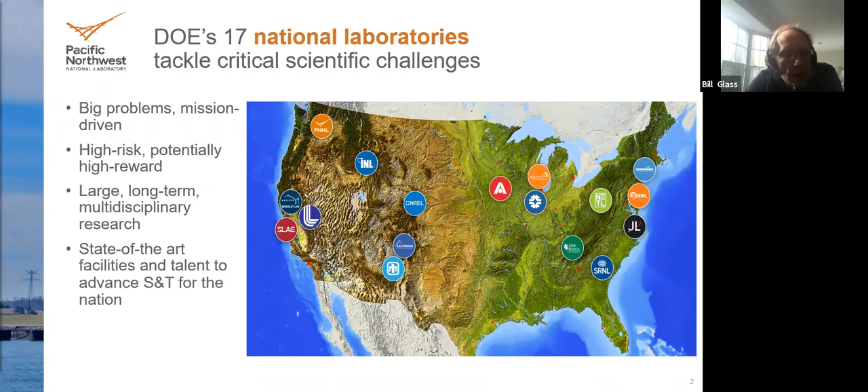Why doesn't it advance? Frozen. Yeah, technical difficulties? Yeah, let's see what happened. Here we go. There you go. Okay, so we use the page down button and that seems to work.

We've got focus in the areas of energy and infrastructure, energy security and emergency responses, energy efficiency and renewable energy sorts of things, nuclear energy and regulatory work. That's the area in which I work. Also, we've got a division that works on carbon management and fossil energy and environmental management. So there are lots of different groups, but it offers some interesting opportunities for work.

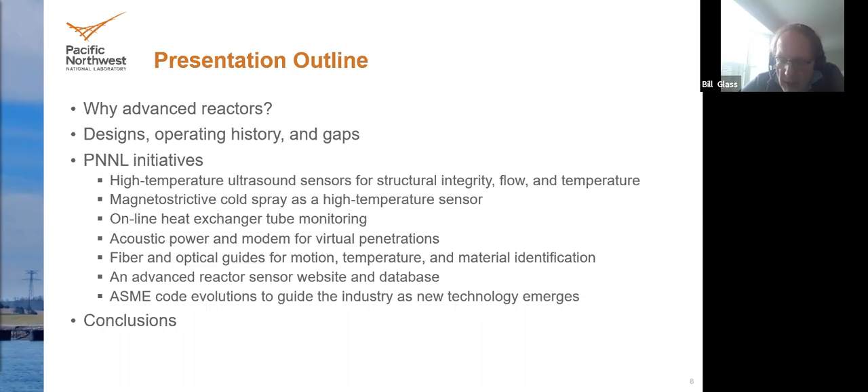Whoop, hang on here, we've got to do something. So this came from something where I had to narrate and make a video out of it, and that still goes with it - I didn't realize that until just now, but I will tell you about it myself personally.

Can everybody see my cursor so that I can point? Yes, we can see it just fine.

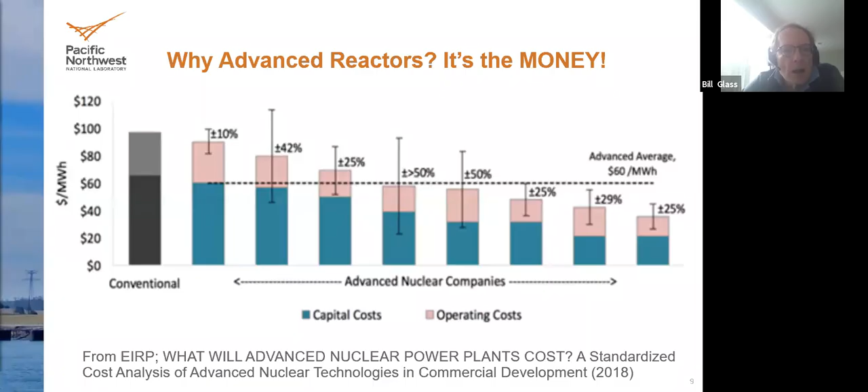Yeah. Whoop. It's not paying attention to my cursor. Okay.

First generation molten salt reactors plan to rely on known component technology. Let's see here. Okay, so they require pressurization of the fuel system to avoid pump cavitation, coupled with spray rings to evolve fission gas and tritium exchangers. In general, though, it's important to consider all of these kinds of things in the design of these reactors.

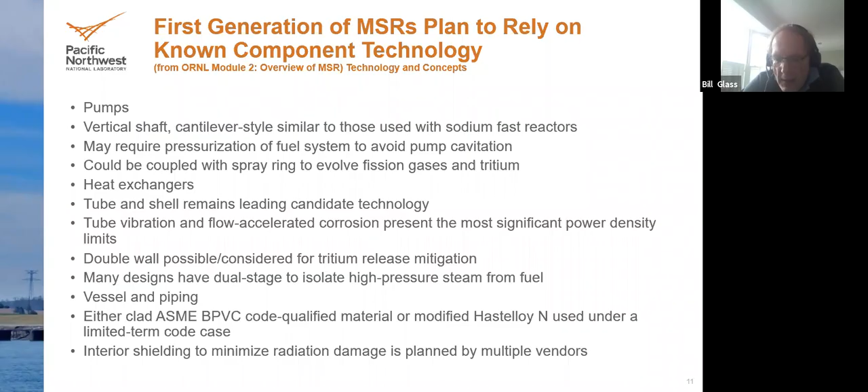Although our experience base is not very wide for molten salt reactors, there is experience for advanced reactors, particularly the sodium reactors. The experience related to sodium reactors is based on a number of plants that have been operated over the years, particularly in France and in China, Russia, and India. So there are literally numerous decades of experience with these sodium reactors, and a report was compiled looking at where failures occurred in these sodium reactors.

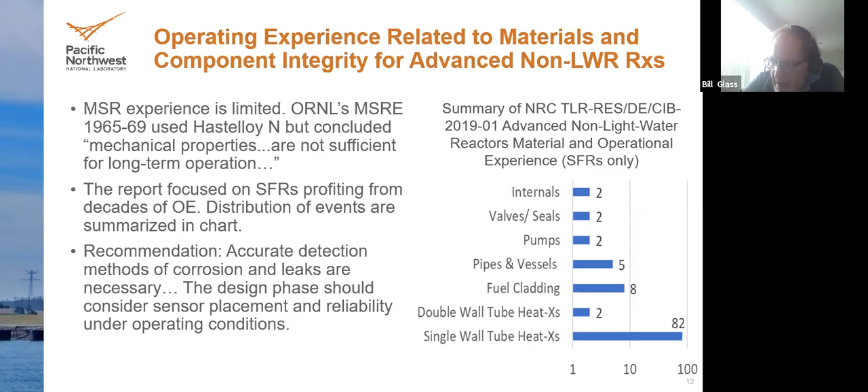By far the biggest component of these failures was associated with the heat exchangers, followed by fuel cladding failures, pipe and vessel failures, and pump seals and internal kinds of things. But this is kind of the distribution that would probably be expected in the full set of advanced reactor series, including the molten salt reactors.

So now I'm going to go over a number of different designs of advanced reactors, just to give you a feel for what these structures are. And they're all quite similar. So we'll start with the liquid sodium reactor.

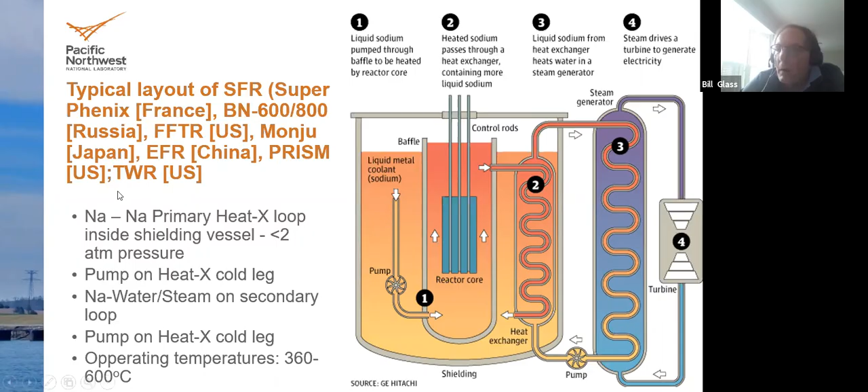Now we'll go on to a very interesting design being promoted by Hydromine. Hydromine is a lead reactor with a single stage spiral heat exchanger. This produces a very compact configuration, and we are actually working with Hydromine on this particular heat exchanger to try to instrument it and see what the condition of these tubes are, and I'll talk about that a bit later.

One important thing to note about all of these designs is that it's tough to get access to them in order to do inspection kinds of things. They are radiologically very, very hot. Also, they are thermally very, very hot. And it's undesirable to shut these plants down in order to be able to go in and do anything to them after they are started. They have to be designed for remotely decoupling most of these major components.

In order to be able to continue to operate if you need to replace anything or to inspect anything, this is why it's very, very important for online monitoring to be incorporated into the system designs. The online monitoring, I believe, will be virtually essential for the NRC justifying these things under continued operation. And candidly, this is a huge gap that we are trying to help fill at PNNL. Online monitoring, currently we don't know how to do that at the temperatures and in the configurations that these reactors are at. This is one of our efforts, though, to try to make this a manageable thing for this Hydromine design.

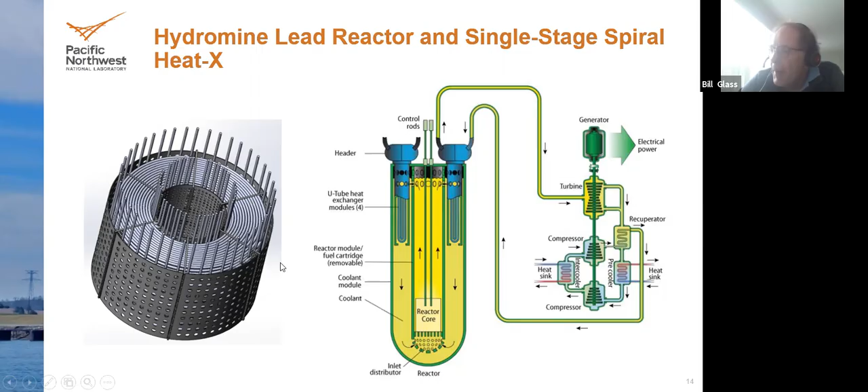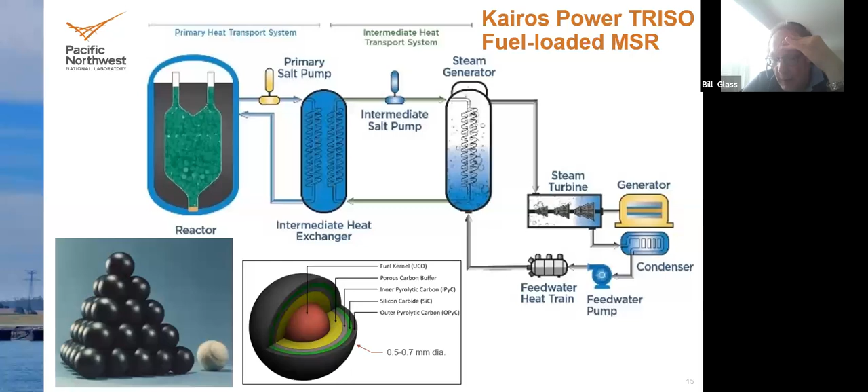Well, this particular design is primarily like the Kairos Power arrangement. Once again, though, you've got one or two levels, in this particular case, 2 levels of heat exchangers before you get to the turbines and the generator to produce the power. Again, though, these are tough to inspect. You really need to have online monitoring kinds of things.

Dissolved fuel MSRs produce an even more complex inspection issue, because this is radiologically the hottest kind of coolant fuel, in that the fuel is dissolved in the molten salt. But at the same time that you get more difficulty for inspection and a hotter environment, you also get the benefit of having the fuel in intimate contact and dissolved in the coolant, so that it's probably the most efficient way to produce the heat. There's less thermal losses due to the salt having the fuel directly in it.

Again, there are heat exchangers in this system. In this particular case, though, the idea for the FLIBE system is that their last stage, where they have pressure, is a gas heat exchanger rather than a salt or water heat exchanger. So that's a little bit of an aberration for that kind of design.

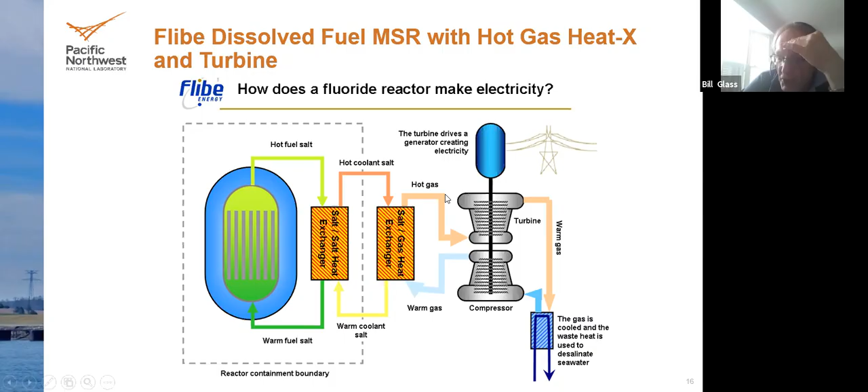Overview of some of the main distinct types of systems. We've got the molten salt single fluid. We've got the molten salt fast reactors. All of these are compared to LWRs like the AP1000. Then there's the sodium PRISM design and the Terrestrial Energy IMSR design here.

All of these things, though, if you look at the hot leg temperature, the AP1000 has the lowest hot leg temperature, and this is where we know the most about components operating. All of these other designs go from 5 to 700 C, which is really hot. And the material gap for these kinds of things is significant.

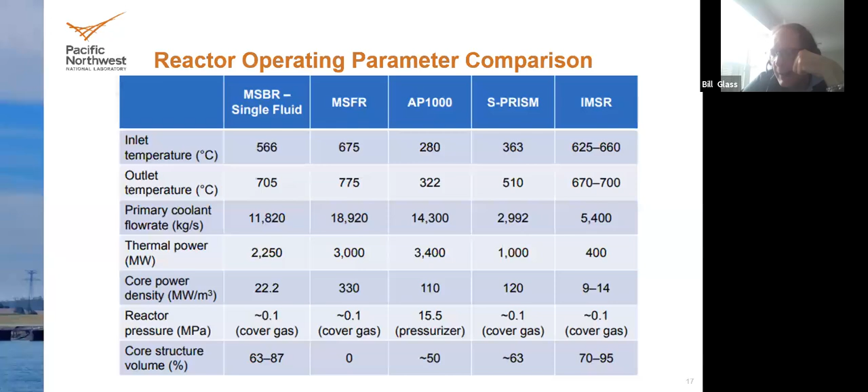We are trying to help plug some of that gap, but right now and today, I'm going to talk mostly about the inspection gap.

So this is a little bit of a physics kind of lesson.

Magnetostrictive electromagnetic EMATs are known to produce a strong acoustic or ultrasound pulse by pulsing the magnetic field in the coil that is under the bias of the magnet. This is a Joule effect kind of thing, and the reciprocal Villari effect allows you to sense using the same basic principles.

One problem with magnetostrictive material, though, is that it's normally adhesively applied, and this doesn't really work well with nuclear applications. So PNNL has been exploring use of magnetostrictive material, and instead of using adhesive-applied ferrous cobalt strips, we've been looking at nickel and other magnetostrictive materials to metallurgically bond these materials to the substrate, and thereby generate guided ultrasonic waves with a suitable material that can live for decades attached to a nuclear power reactor.

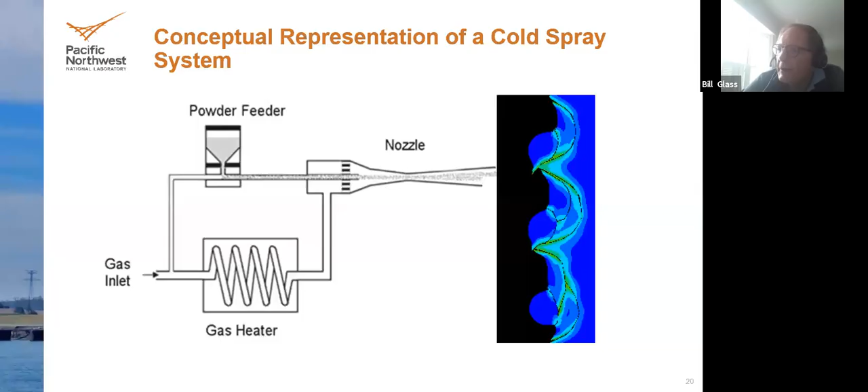The cold spray happens by accelerating 10 to 100 micron particles up to about Mach 2 or Mach 3, where they then impact on the material substrate. They don't get really near the melting temperature of these particles, though. Rather, they form a splat, which is a metallurgically bonded particle to the substrate. You can build up significant layers with this cold spray material.

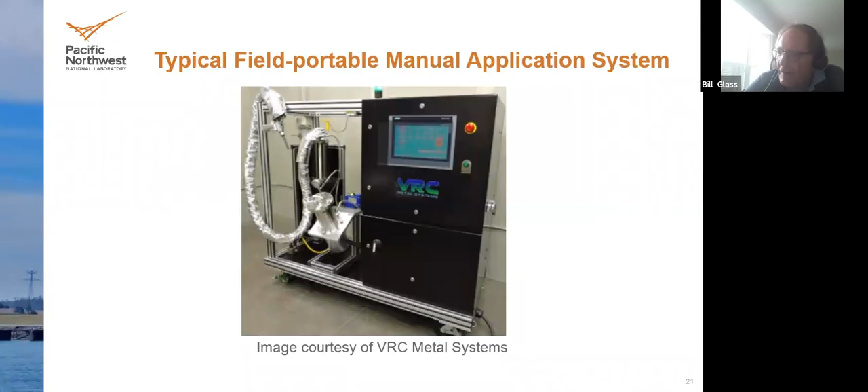Here is a real picture of a cold spray system like what we have at PNNL, and what you can get to either do factory cold spray work or in the field, in situ cold spray work on these systems.

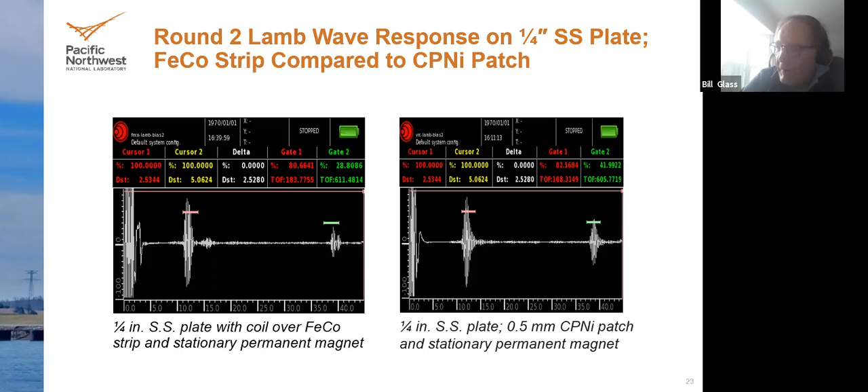This shows the relative amplitudes of things, showing that it does make a difference how you do the cold spray, and there were a number of different recipes that we used, but the bottom line was that when we compared the cold spray versus the adhesive patch, we get similar kinds of responses. So we were pleased with that.

And this is a technology that is licensed to a company, actually a company just north of us here in Washington, called Interspec. So it's a real commercial thing now.

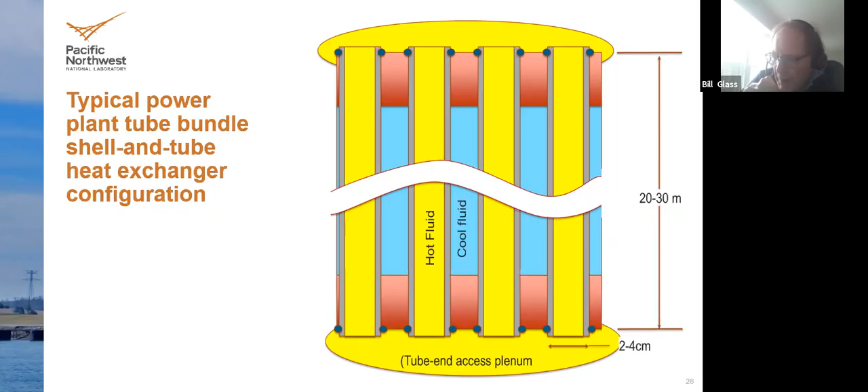We need a way to monitor the condition of these tubes permanently and online. It is possible, and some people have demonstrated that you can produce and put a sensor at the end of the tube, inside the tube, and send an ultrasonic wave up along this tube. It travels quite efficiently, and you can see relatively small flaws down to 50% through wall small pits from a sensor mounted inside the tube.

You can go into a heat exchanger and do that when the heat exchanger is offline. But if it's online, it's tough to do that. Online, when the heat exchanger is operating, this is a high flow area. You've got a great deal of difficulty trying to get the wire out of this plenum, plus it would occlude the fluid and render that tube way less efficient, which is undesirable from the overall operation of the plant.

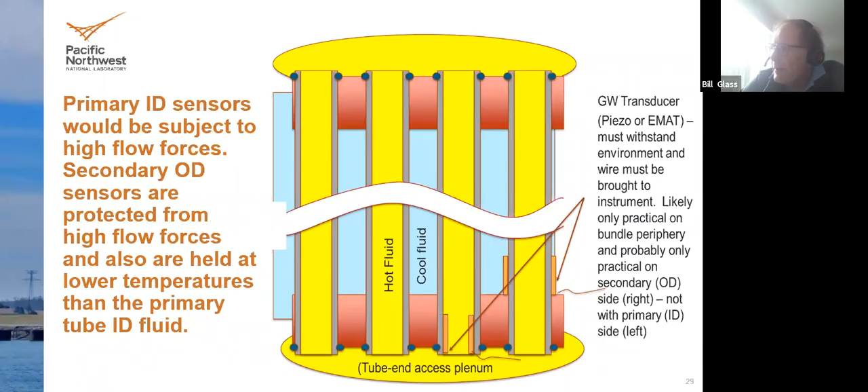If, however, by contrast, you put the sensor on the outside of the tube, then it's in a relatively stagnant flow zone, and you can monitor the tube condition from the outside, or the tube OD. This is possible to do, but only if you do it in conjunction with the fabrication of this heat exchanger, because otherwise this area is just completely inaccessible.

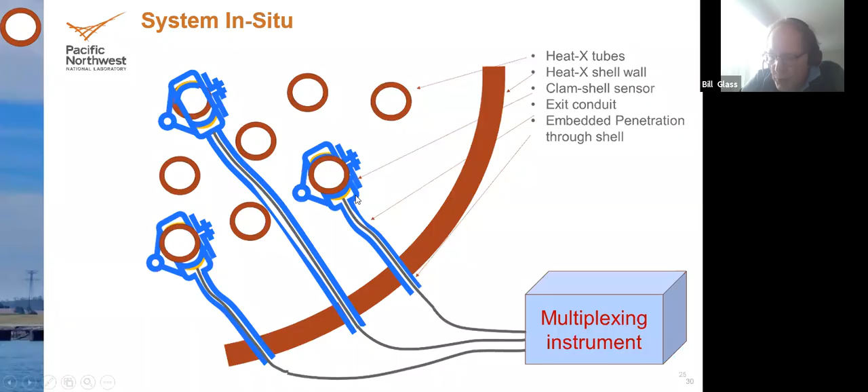Our effort for the Hydromine project is to be able to mount sensors on the outside of these tubes and then bring the wires out into a multiplexing instrument such that we can do online monitoring of these heat exchanger tubes. We are making progress on this.

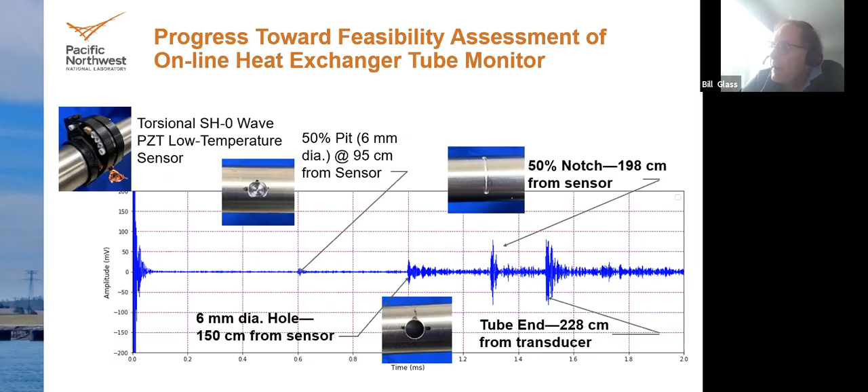Here is a 50% notch further down the tube. In this particular case, it's only a 10-foot tube. We are having fabricated, though, a full 30-meter tube, and we expect to have similar kinds of performance with the 30-meter tube.

We also wanted to confirm that we could have a relatively small section of the tube that would be instrumented with the array of sensors. So we did a test where we had the array over a small portion of the tube, and then we moved a sensing element first axially, like 2 centimeters, then 5 centimeters, then 20 centimeters down the tube, and then moved it circumferentially all the way around the tube.

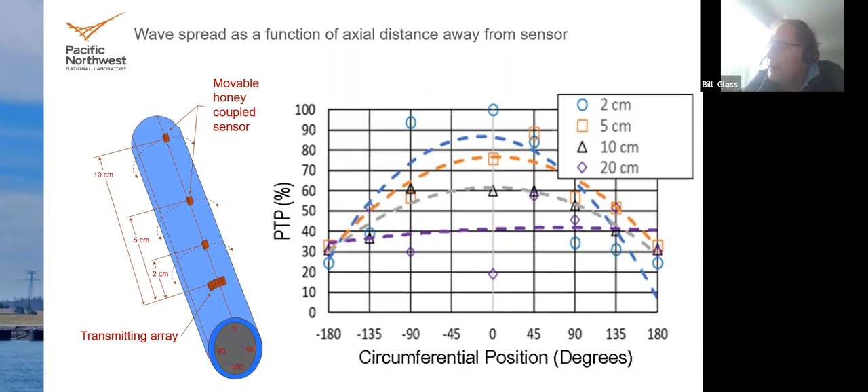Here you can see that at 2 centimeters, we still have some change in the sound level, but as we go to 20 centimeters, the sound level or the acoustic energy is relatively flat all the way around the tube. So a small array can fully cover the tube after it gets up to 20 centimeters away from the sensor elements. That was pleasing - one of the studies we have done in order to qualify that kind of thing.

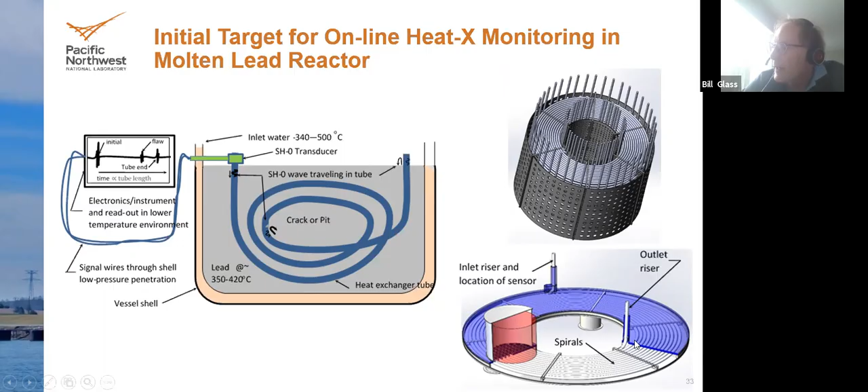We think that we can make these sensors last in this particular case simply in the argon environment, where the sensor is mounted on the inlet riser, and the location of the sensor would be here, and we can send the signal all the way around the tube. So that's a current project that we're looking at.

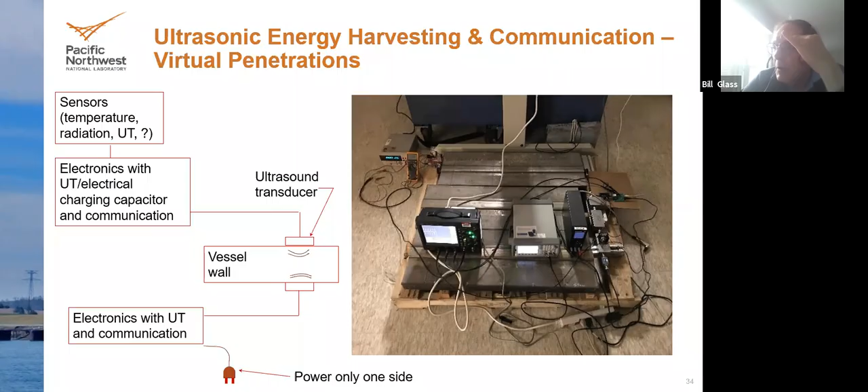Meanwhile, we've got folks who are interested in this kind of technology for lower temperature applications. You'd be surprised how many people want to do stuff without punching holes in things. Fiber optics.

But even there, there are fiber optic sensors where the light stays in the fiber and you can get the kinds of information you'd like to have, including temperature. You can still get motion in the fiber if it's anchored to structural elements. The point is that we can either get fiber into the reactor and into the coolant through penetrations, or we can have periscope types of things where we get into the coolant.

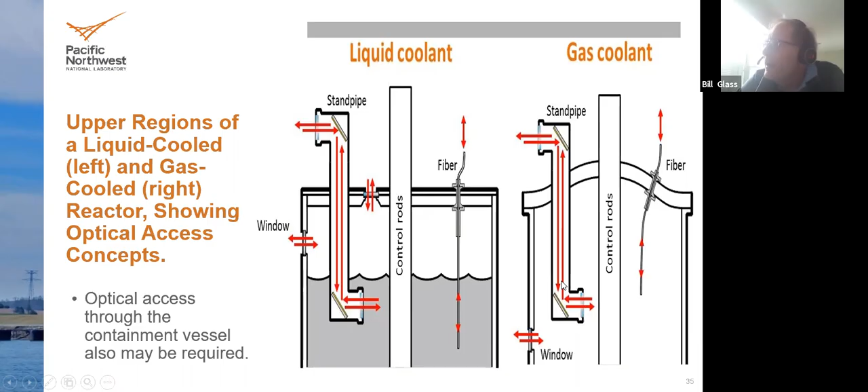In many cases, you want to also include lasers in these kinds of systems. There are all kinds of things you can do with fibers and lasers, and they do work in these molten salt and liquid metal environments.

One particular technology we've acquired most recently is the laser vibrometer, where we use the laser to measure motion of structural components in the system, and that's kind of cool. We've had several projects within our little NDE group to use this laser vibrometer, and it's a heck of a tool. It's not cheap, but it's a heck of a tool, and these kinds of things will get more and more cost effective, and they can help with these advanced reactors.

We are pretty convinced chemical characterization of salt is a really important thing, and you can do that with lasers through fiber. In this particular case, we've used the fiber and laser to look at a number of different peaks in the FTIR to try and characterize various components in the salt.

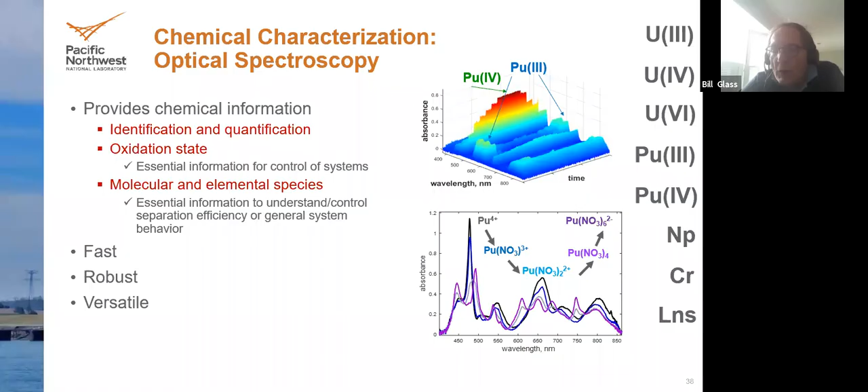This is a tough thing because there's not a huge call for these kinds of things, since these advanced reactors won't be built for another 10 years probably. And in 10 years, the number of these sensors might not be huge, but the national labs, various universities, various entities are building these kinds of sensors that either do work in these kinds of environments or theoretically can be made to work in these kinds of environments.

It's important to give designers of these reactors hope that they can have sensors that will do what needs to be done, and give sensor vendors a feel for what the environment is that they need to design these sensors for, and try to bridge the gap. I think this is a good initiative, and we'll see how well it's actually used. It's tough to get people to look at what's available, but if you make it easy, lots of times they do.

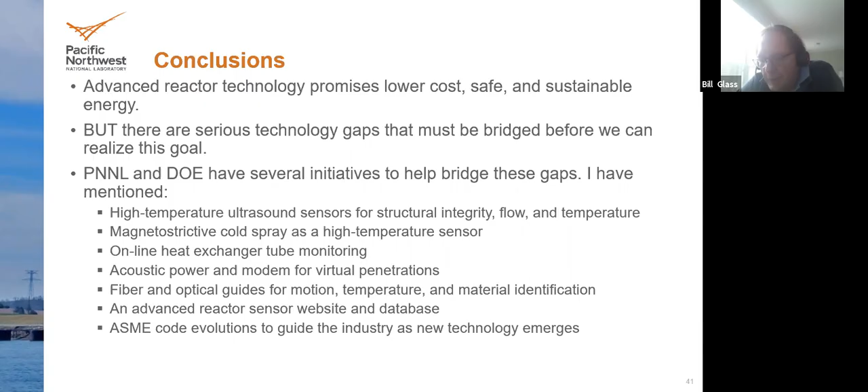So that was kind of the pitch and the introduction. I am now completely available for thoughts, questions, comments. All right, what do we got?